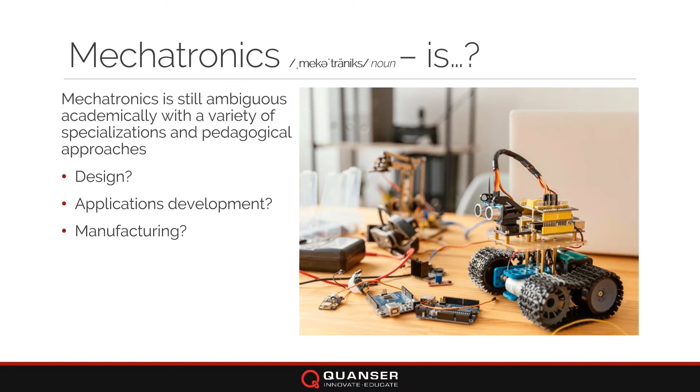But to us, it was something of an advantage, because if we look at what mechatronics means to students, we can talk to a lot of students, a lot of graduates who work for us, who went through mechatronics programs, and learn what it means to them, what they learned about, what they view coming out of these programs as the essential learning objectives and skills for mechatronics.

We can talk to employers, we can talk to ourselves. We are a mechatronics company. We are one of those industrial employers for mechatronics engineers. And so we started there. We looked at what mechatronics means to Quanser as mechatronics professionals, as a company that's been designing and developing complex mechatronic systems specifically for academia, but also for industry and for research, for over 30 years.

What do we view as being the core elements of this modern mechatronics category? And really what we view are all these systems you see around you nowadays—these increasingly complex and integrated electromechanical systems that are interdisciplinary by nature, interconnected, and interesting.

They're fascinating systems to work with. They're the ones that you see in the news and on YouTube as being the really exciting things to watch. Boston Dynamics, SpaceX, Tesla, all these companies, they're building mechatronic systems. And so for students, there's a lot of motivation that comes out of that. There's a lot of elements that they want to know about. They want to investigate and learn how they work.

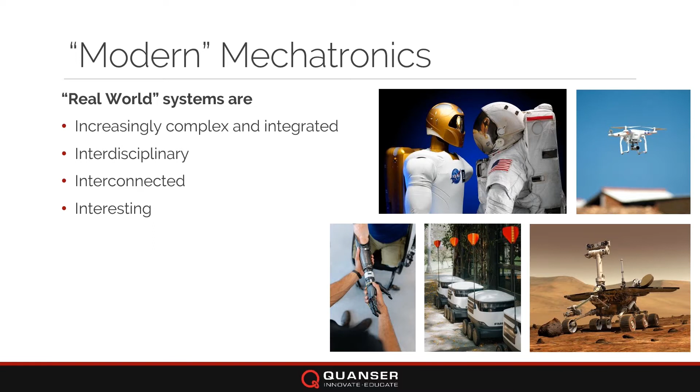And again, that's an advantage for a company like ours and for institutions who specialize in mechatronics, because that motivational element is an absolute catalyst and key to student success. So what we did was take those notions of what mechatronics is as a field, as an application of engineering, and from there we derived four key elements of what we view as the essential outcomes, the essential objectives of engineering education when applied to mechatronics.

Starting with this prioritization of design intuition over design experience, what we're getting at is that with these complex systems, this diversity of applications across all these specializations in mechatronics, design intuition is increasingly becoming far more important than direct experience. When you're designing a product, an electromechanical system, to us that process is a series of decisions, a series of educated choices that you make as a design engineer.

And because mechatronic systems are everywhere, all around us, everything from snowplows to airplanes, it's really difficult to give specific direct experience to students. It's far more useful and valuable for them to know, generally speaking, what best practices are, and how to make informed decisions if they've never been in that position before.

And that builds on literacy over specialization. Again, because mechatronics is highly interdisciplinary, highly generalized and multifaceted, having literacy in engineering generally, understanding what systems engineers do, what electrical engineers do, what mechanical engineers do, even if you're not one of those things, is extremely important for a mechatronics team. That means you can see where they overlap, see the considerations and design decisions that will influence other parts of that design, and ensure your part doesn't conflict or cause issues.

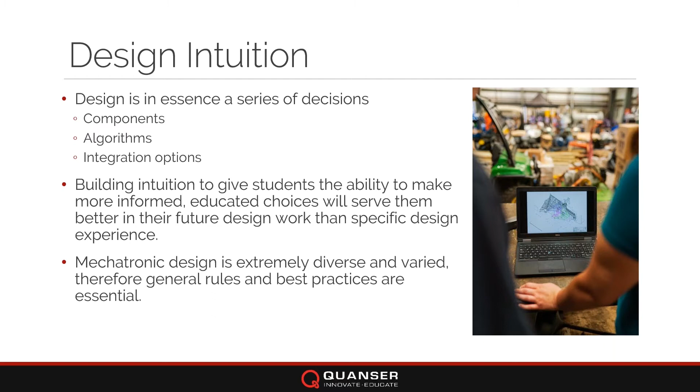It's absolutely essential, because it means that in that diverse and varied mechatronics engineering category that spans the industrial and academic space, they'll have a better idea of what the right move is when making those design decisions.

Engineering literacy also builds on that with interdisciplinary teams from mechanical, electrical, software applications. These are the categories we have at Quanser, the functional groups inside our R&D department. That's for a reason - as I said, we are a mechatronics company. That's how we make sure we can build the complex systems that we build.

We have specialists and generalists in other categories, and there's a nice healthy flow back and forth where if you're a specialist in application design or mechanical design, it doesn't mean you lose that expertise. But because of the interdisciplinary nature of our projects and project management, you get exposure with all the other disciplines to the point where you understand what they're concerned about, what they do, and therefore you can talk intelligently about the considerations that need to be looked at, and how the decisions you make influence those other elements of a complex mechatronic design.

And finally, this idea of design dissection. How do you take these complex systems, like an automation line building parts of a vehicle, and give students those experiences and skills without necessarily building something like that from the ground up? You see behind there the classic approach that might have been taken in the past, where students would breadboard and use microcontrollers and 3D printing to get an experience that might ostensibly be viewed as a design experience for a mechatronic system.

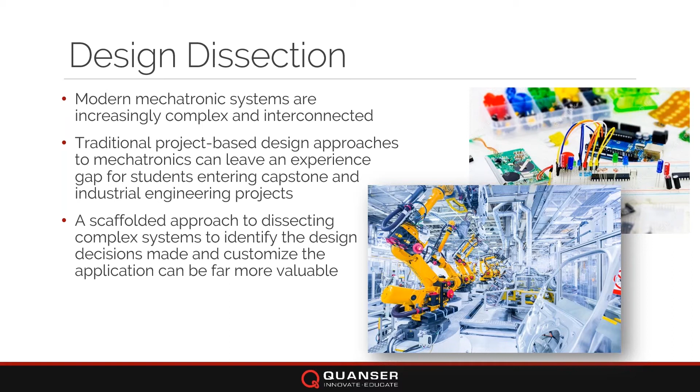And finally, this idea of authenticity, which overlaps that previous topic. Mechatronics is centered on design and development of electromechanical systems. It's inherently practical, but at the same time it needs that appropriate level of theoretical rigor. It needs generalization so students have intuition. And authenticity builds on the motivation you get from the excitement of exploring these complex systems, to really give students the context and motivation to follow through on these investigations.

That said, authenticity doesn't have to involve these fantastic categories I talked about. It doesn't have to be SpaceX rockets, autonomous cars, self-driving drones, and all sorts of exciting things. It can be as simple as snowplows or doorbells - systems that may at face value not seem as exciting, but if there's an authenticity, a motivation inherent in the challenge, they can be just as exciting for students, if not more so.

When we were doing design courses at one of the universities I worked at, we would often give students challenges completely outside of what they'd typically be exposed to - things like environmental monitoring of waterways around the university, working with interdisciplinary teams from environmental engineering or other disciplines to see what challenges they faced and how mechatronics engineers could solve them, or working on prosthetics for children or adults to ride bicycles or drive cars. These authentic challenges aren't necessarily as fascinating to engineers as backflipping humanoids, but they have that level of authenticity and engagement that ensures students want to succeed and see how in the future they can take on similar challenges.

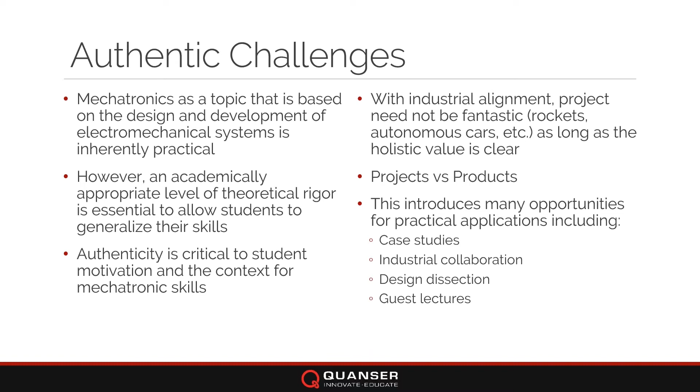And that's a completely different challenge. Obviously you can't give students that exact challenge, but you can give them insight into what would change, what would be a critical decision point if they were to go down that path. This introduces lots of opportunities - case studies, industrial collaboration, guest lectures, all sorts of other opportunities to give them that authenticity of what happens once they leave their undergraduate studies.

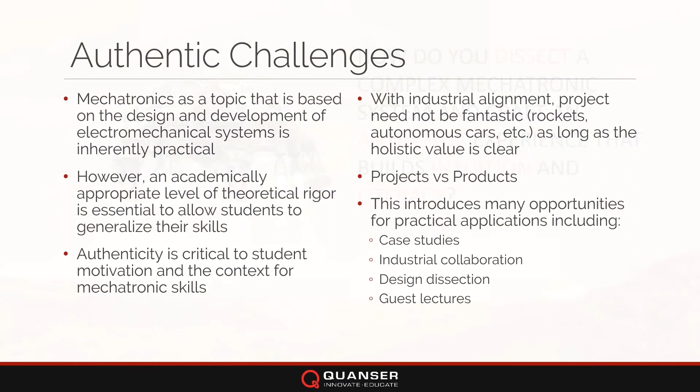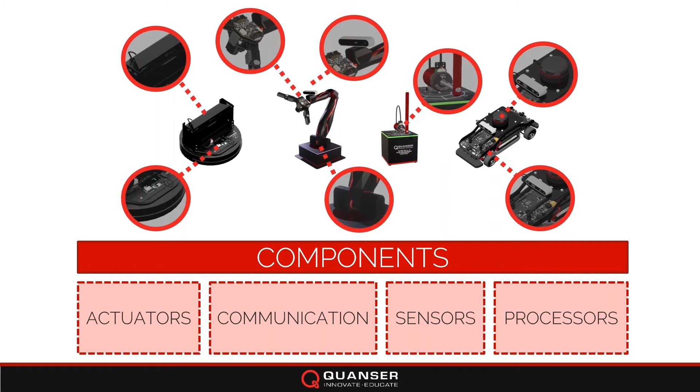But how do you do that? How do you dissect a complex mechatronic system into an authentic experience to build the intuition and literacy? How do you pull all that together? For us, that really starts at the component level - you start at the bottom. Our systems are built up using actuators, communication systems, sensors, processors - all those building blocks of a mechatronic system.

And then on top of those, once students have familiarity, a functional understanding of what those components are and how they work, what they give the rest of the system in terms of information, and how you work with them and interface to them.

We build on top of that systems, devices, and algorithms. So algorithms to take advantage of those components, things like signal conditioning or kinematics, devices that are built up from those components to be able to have, for instance, actuators and sensors come together into a mobile robot, or to have communication systems sit on top of processors. And then overarching systems where you have multiple devices all working in tandem to a common goal, especially with the advent of edge computing and IoT.

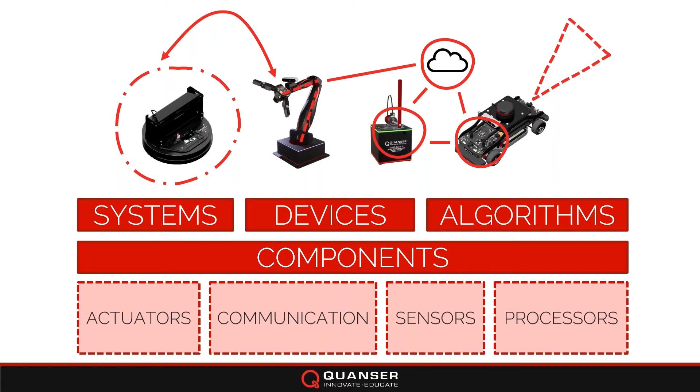These interconnected systems are also really becoming essentially mechatronic systems even in and of themselves. It's very difficult nowadays to separate out some of these lower level devices into individual devices because they require a connection to other systems. But really, that is mechatronics.

That is the core of the elements that go into a dissection, that go into an investigation of this complex systems, and how we generally, when we build curriculum, categorize those experiences so that students can scaffold their skills to the point where they're ready for the application, they're ready for these mechatronic systems to do something.

You can see here some examples of outcomes that we've worked towards, things for component literacy, like an understanding of diagnostics, an understanding of integration techniques, control systems, even things like design for manufacture, costing, regulatory requirements, component selection, reading data sheets, all those real low level essential tools and techniques for component integration and for mechatronics generally.

And then once you build up from there, you can get into things like device proficiency, how you apply algorithms to systems, how you work with different degrees of freedom, different types of embedded computers and communication paradigms to be able to make those components into functional devices.

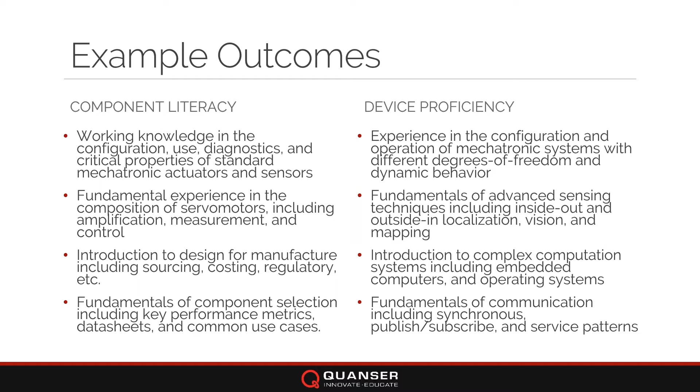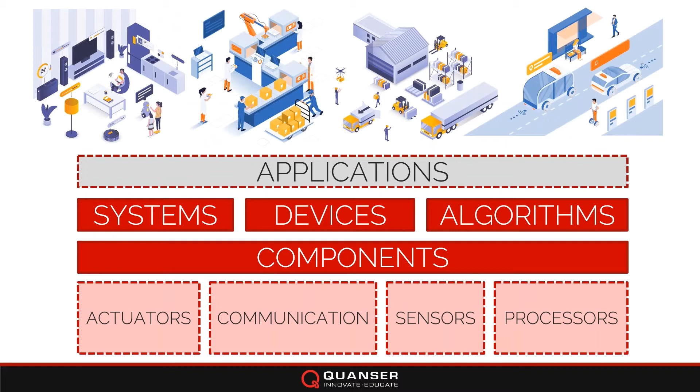It doesn't end there though. As I hinted at, you still have this application layer that needs to sit on top where you take those and they do something. And to me, that's really where we get into those adjacencies of things like robotics and automation and intelligent systems. They're the application layer that sits on top of mechatronics.

To me, if you look at mechatronics as the foundation, the act of designing and developing and integrating components and algorithms and devices into mechatronic systems, that is the essence of mechatronics. That is the core of what a mechatronics engineer does. And then autonomous systems, robotics, those disciplines, they're the application of that system.

So there are some examples here, things like mechatronics to robotics is science to engineering, or for autonomous systems, it's not the design of the robot or the construction or operation, but the behavior that autonomy is responsible for. The rest is the responsibility of mechatronics engineers.

So it's almost a generalized field where you take your cross-disciplinary skills, build up electromechanical or complex integrated systems, and then the layered intelligence, the layered application context, what you do with that system outside of perhaps some corner cases where there's a very specific use case that is not going to change, something like a dishwasher or a more simplistic system.

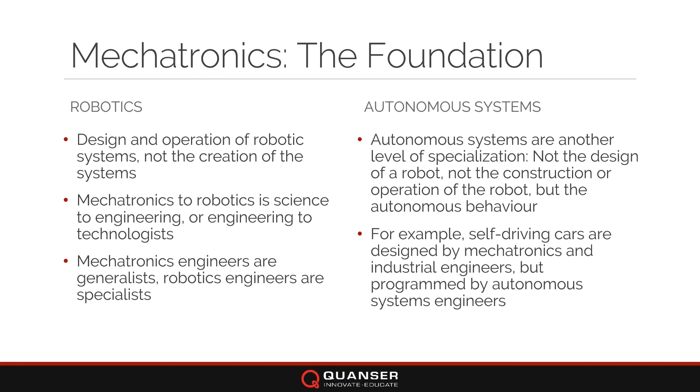That is the goal, is to build up something that can then have that layered intelligence, layered autonomy put on top of it. So if you look at how you can complement these thoughts when you're delivering a mechatronics course, I'd really encourage a lot of educators to look at how mechatronics does, to a certain extent, end with the system and with the creation of that electromechanical platform.

But to be able to design something to be effective for robotics, for autonomy, for intelligent systems, there needs to be some understanding of how it's going to be used, how it's going to be applied to those challenges. And so having at least that engineering literacy for those adjacent topics is also crucial.

Now looking at what Quanser has been doing to be able to address these things as a company, we really start with looking at our mechatronic systems, our platforms that we develop. We make sure they're highly instrumented, they're electromechanically flexible, open and customizable. This ensures that, again, no matter what that application is, all those different diverse fields from IoT to intelligent systems and robotics, they'll be able to fit the bill.

They'll be able to be that foundation that you can build those applications on top of. They're reliable and repeatable and robust. Those are general goals for most mechatronic systems. You'd like them to last as long as possible and to work reliably and repeatably. Again, documentation is also key to being able to serve as that foundation so that you don't necessarily have to worry about interfacing or customization or how you work the system, how you drive it, how you operate it, but more what you do with it should be the focus.

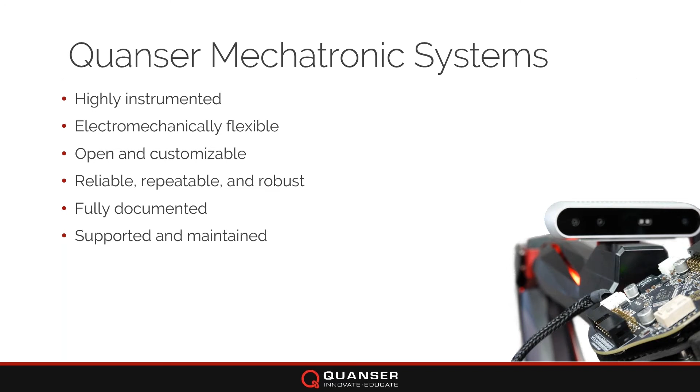And then finally, obviously, we support and maintain our systems as an overarching goal. That diversity is there, as you can see, with the collection of platforms that we develop. Looking at this, it kind of begs the question again: how do you dissect these? How do you deliver those four pillars of modern mechatronics using one of these systems?

So let's take a look at that. I think we'll focus in on this Qbot. It's a really nice platform to show some of these fundamental concepts of mechatronics. I'm going to be using, for this particular case, a virtual Qbot, just because in my bedroom, while we're still working from home as a company, it's challenging for me to give a really effective mechatronics demonstration. So that's the advantage of digital twinning and our virtual platform.

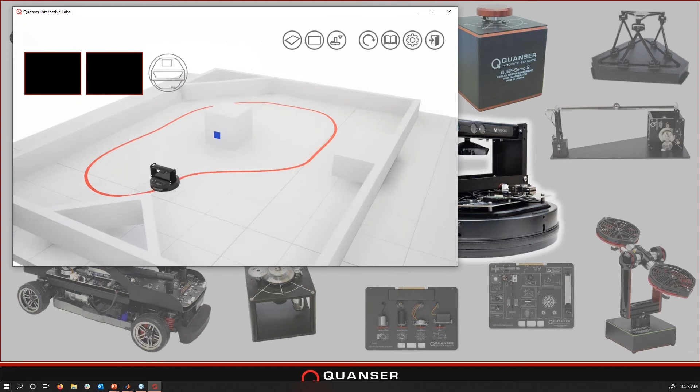So I'll choose the Qbot 2 here. You can see here now we have a virtual space where I can play with the Qbot. And what I'm going to do is just open up MATLAB. In MATLAB, you can see we have our courseware for mobile robotics applied to the Qbot, broken down into categories: computer vision, kinematics, mapping and localization. These are the applications of that mechatronic system. But if I go into introduction, you can see that we're dropping down a level, down to that base component, that base movement, and how things like kinematics apply to an actuator.

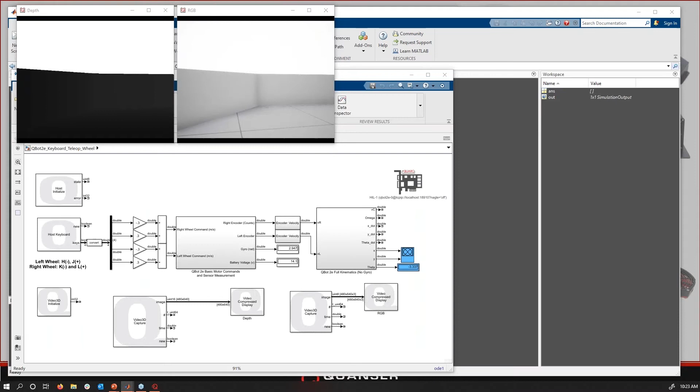So if I open up a very simplistic example of how you can show the interface between actuation of this base platform, and how an algorithm can be applied to build it up into a device that moves around, I'll just quickly run this Simulink diagram. What this is going to do is connect to the virtual Qbot. You can see here now I have my camera feeds loading up so I can see what the camera is seeing on the Qbot.

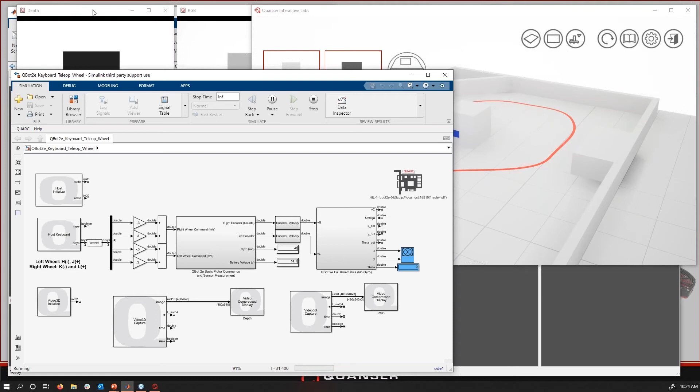And you can see here the interfacing is very simple. I'm taking keyboard inputs from my keyboard here at my computer, turning those into commands going to the two separate motors, pulling encoder information from those servos, and applying a kinematic loop to that, as well as the camera feeds, so I can see where I'm going. And so you can see here I have my virtual RGB and depth information, matching what I have in the virtual environment as what the robot is seeing.

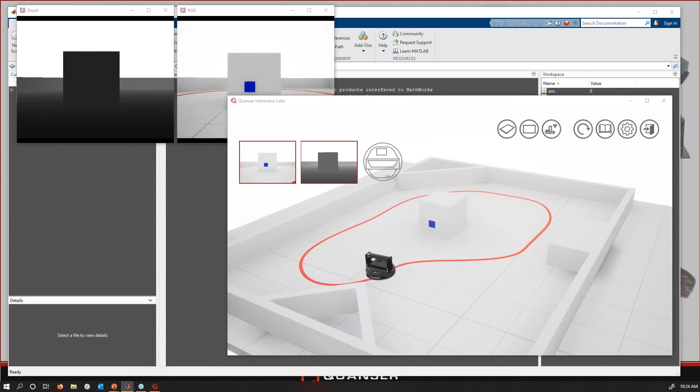And if I start driving around — let me just move this over a little bit while I drive around — you can see here that the keyboard commands that I'm sending are going to move those actuators. And just from this very simple experience, as a student, you can start to get a feel for what the kinematics means for this robot, what actuating those two motors means for the sensor information you're getting, and also for the actual movement of the device.

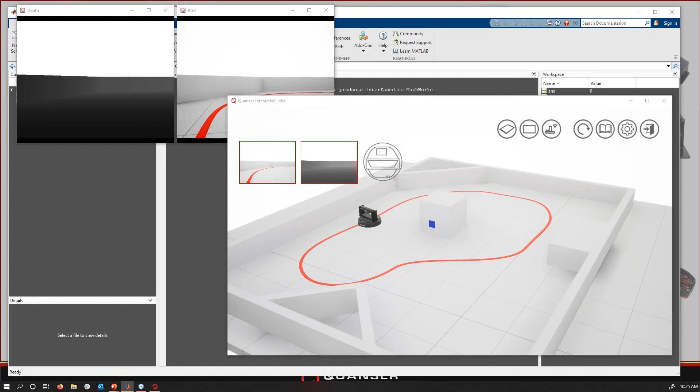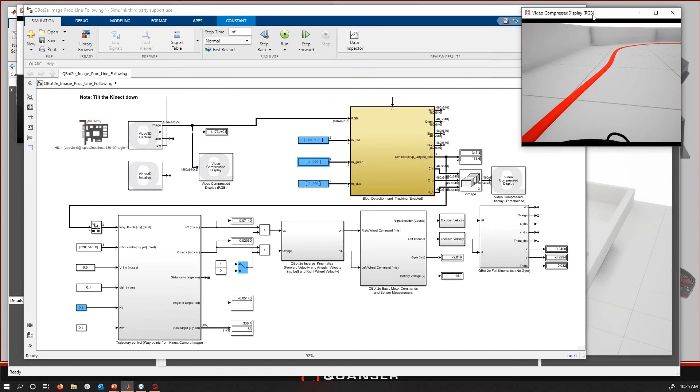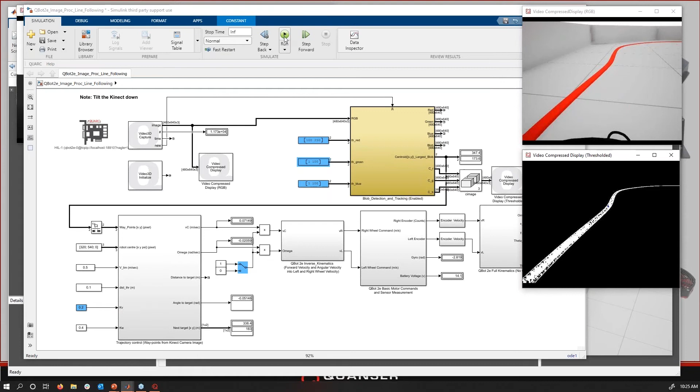To build on that, if I stop that particular model and layer on top of it another level of intelligence, now we're going to look at how we can take that camera information and automate the process of moving around the space, in this case, following the line. You can see here I have a threshold applied to my RGB information to pull out this red color. Then I'm going to use that to build a blob or area identified as the largest section of red the camera is seeing, and finally drive the robot towards that. So if I run this code on my virtual robot, we should see it identify that line as its target, its orientation, and then move towards it.

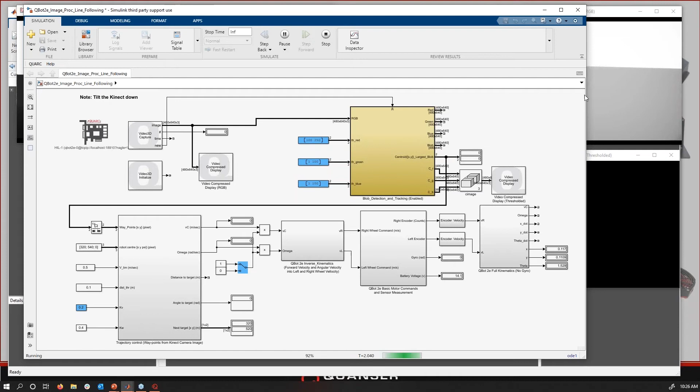Hopefully — oh, I lost my threshold. Just give me one second here to try to get that threshold back. So basically, despite the complications that students can encounter, I think I need to aim a camera down, for instance — that would probably be a good move. There we go, now it's working.

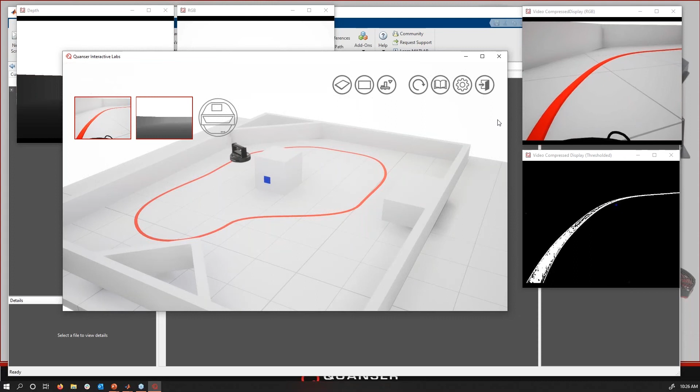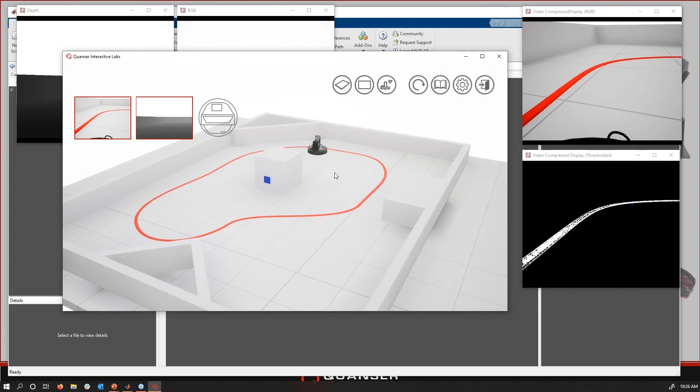So again, the challenges of a physical system, the challenges of this integration, where everything was working, my algorithm was seemingly functional, it was seemingly following, but at the same time I hadn't pointed my camera at the target. It was missing the element of this space that it was scanning to know what to follow. After I moved that camera down to a better orientation, bringing in that mechanical aspect to the vision aspect of the integration levels, now my algorithm is working. You can see here with the blue dot identifying that point that it's going to aim towards.

So whether it's virtual, whether it's physical, whether it's a robot or any of our other systems, we try to give that scaffolded approach, try to give that experience where students can see how the algorithms they develop, the components that have been put together, what their function is, what their element to that system is, and how working with those different parts influences the rest of that overarching mechatronic system.

And then we take those devices now increasingly and we try to bring them together into studios to elevate those outcomes, elevate what can be done with those systems.

This is just a brief description of how we view studios as being an ideal way to deliver these mechatronics experiences. They focus on problem and project-based work, and the whole idea behind a studio, this is something that's been talked about for decades in engineering education, is to really deliver to students the skills they need to be able to build a portfolio to then be successful in their later endeavors, whether again it's an academic or an industry.

They need to have a portfolio of experiences of intuition that they can build on, and a studio is a perfect way to give them that with these open-ended challenges that they can follow up on and try to use in order to build those skills.

And obviously, just from that description, the efficacy is clear. Students get the skills more effectively, they're more driven, more self-directed, which again, in those interdisciplinary fields where there is sometimes only one specialist is also key. And out of it, they get that portfolio of experiences, of applications they've done that hiring teams look for.

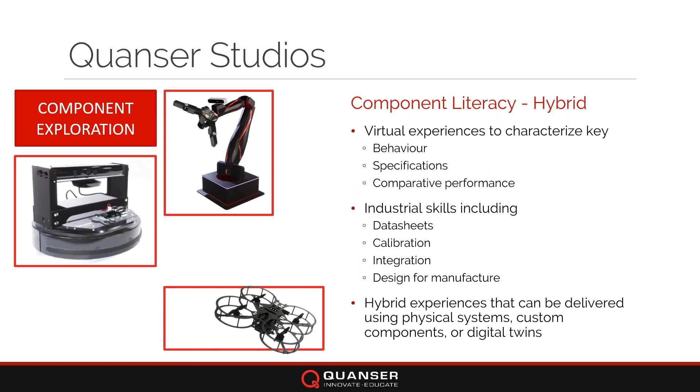And those students, again, with those scaffolded divisions, that buildup of these skills, it's absolutely also built into the studio. You can do component exploration across different systems. You can understand all of those outcomes that I described earlier and how they apply to the different systems separately.

And then how, when you get to the system integration and algorithm level, you can bring those together and actually see things like basic intelligence or integration of multi-system scenarios to really understand how all of these elements come together with more and more complexity.

And then finally, we also have some custom applications we've built up over the years. One example being the pivot project we partnered with McMaster on, where their goal was to redesign their first year experience to try to give students these skills and experiences very, very early on.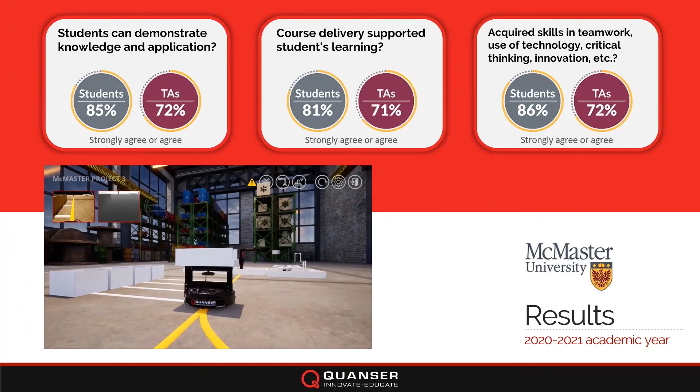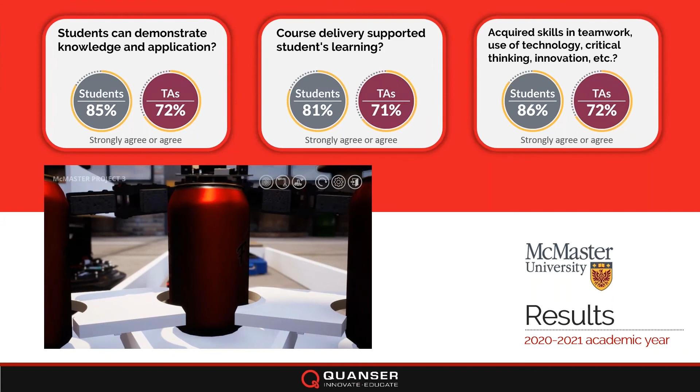And using these approaches of combining virtual representations, obviously because of the pandemic, but now in a hybrid configuration this year, giving students those intuitive experiences, those elements of mechatronics design very early on, has paid dividends not just in the student skills, but also in their retention, their potential to continue in engineering and understand what the benefits are going to be of an engineering career.

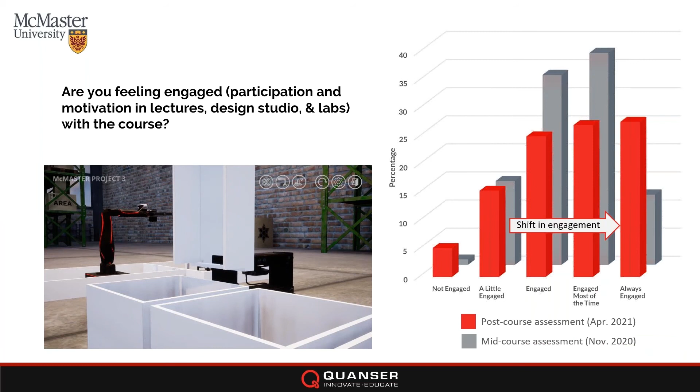And so with that engagement, with that motivation, authenticity, all those elements I talked about, we really see it pay dividends not just for the students, but also for the institution.

And finally, this is kind of the overarching culmination of what we view as being mechatronics generally. It's that mechatronic systems, again, they're increasingly complex, they're increasingly integrated. All of those elements I talked about at the beginning of what modern mechatronics is.

And those complex problems, not just of creating these systems, but applying them to challenges, it requires complex solutions. It can't be something that students create themselves under the environmental restrictions of a university.

Having these systems to start with that are interconnected, that are interdisciplinary, that can be dissected into these components and then used to scaffold up new experiences for students, it's absolutely something that students are going to need, that system level thinking, and something that's increasingly common as a skill set that's essential to both research and industry.

And finally, we hopefully can help if you're interested in this kind of approach, if you want to develop a system or a course to deliver these experiences. We're working on new and exciting solutions day in and day out to be able to deliver these skills more effectively. And hopefully you'll stick with us to see what comes out of those efforts.